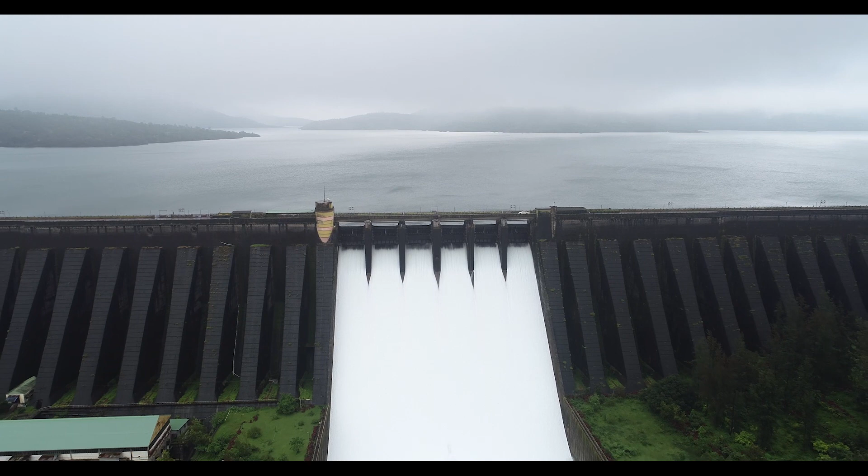The geographical character and features dominated by the Sahyadri ranges supported Chhatrapati Shivaji Maharaj in establishing Swarajya. In the mid of these Sahyadri ranges stands tall the Koyna Dam to fulfill its goal, keeping an example of the dominant character of Sahyadri ranges.

Millions of years ago, the outpouring of hot lava gave birth to sturdy, rigid and harsh mountain ranges of Sahyadri. These huge ranges also parent many rivers, mainly the 5 rivers of Panchaganga, which originates at one place. The Panchaganga temple at Mahabaleshwar is the original source of the rivers Krishna, Savitri, Gayatri, Venna and Koyna.

The famous Koyna Dam and Koyna Hydroelectric Project is a man-built wonder on the Koyna River which flows through the Western Ghats.

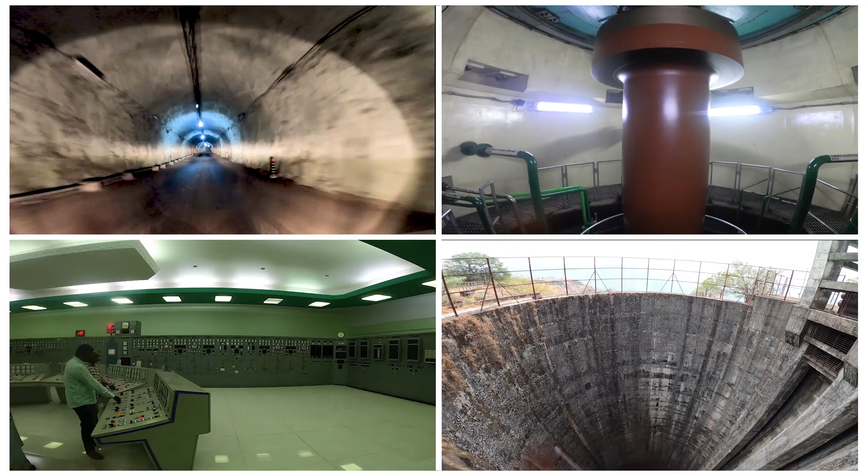For more than 50 years, this man-built amazing structure has played an important role in the development and progress of every sector across the state.

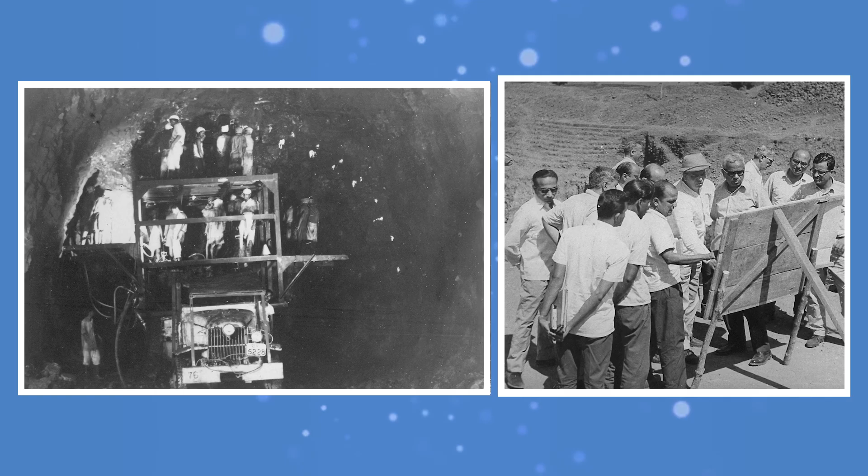Today, 1960 megawatts of electricity is generated through this project, which has emerged from the hard work and sacrifice of thousands of engineers.

This project has also helped in the development of many industries and has illuminated many colonies.

Also, many villages from the Sangli and Satara districts are receiving water supply for irrigation.

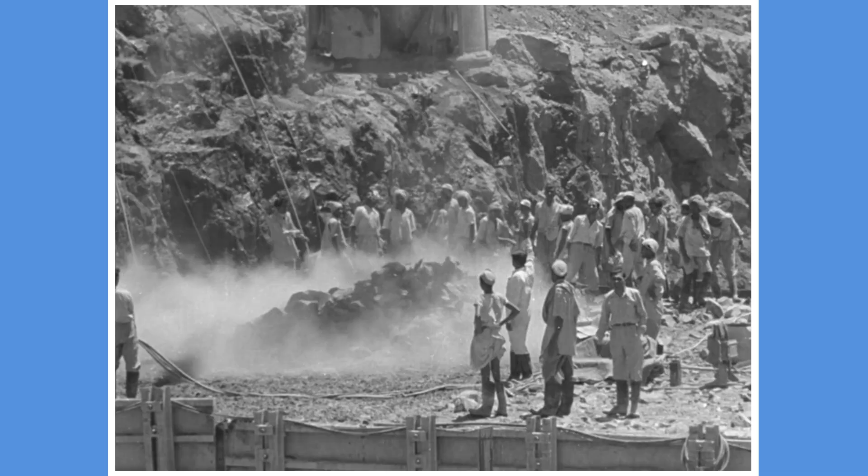But the journey behind the success story of the Koyna Hydroelectric Project was not smooth or easy. The year was 1901-1902, the period was of British rule.

Koyna River, which originates at Mahabaleshwar and flows through the terrain, was considered as a concrete solution on the drought since the rainfall in this region is 5,000 to 6,000 millimeters. 81% of the rainfall blends into the mainstream of the river. The entire valley is 2,000 to 3,000 feet deep.

Trampling on the difficult terrain of Sahyadri ranges, the then British officer H.L. Bill, along with his colleagues, set out for the expedition which marked the first step towards the mammoth and unique task. After combing the region of Koyna and Sahyadri ranges, an appropriate place was earmarked among the few villages for the dam. It was the Helwak village.

In 1909, a detailed report was submitted to the government of the then Mumbai province with an estimated cost of 81,92,000. Meanwhile, the industries in Mumbai were growing and so the demand for electricity too increased.

In the meantime, Meares, an engineer, indicated the possibilities of hydropower generation on Koyna River in the Hydroelectrical Possibilities in India survey.

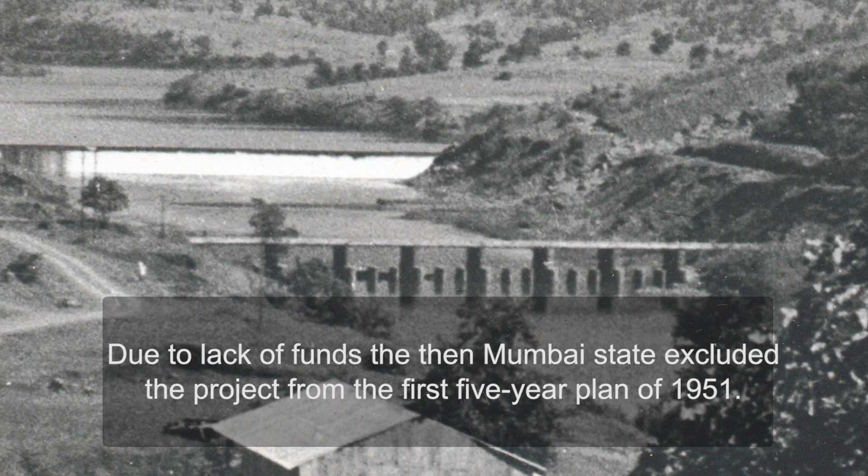The Deccan Manufacturers and Empire Association persistently followed and demanded the Koyna project. Due to lack of funds, the then Mumbai state excluded the project from the first 5-year plan of 1951.

On March 16, 1952, Deccan Manufacturers and Empires Association organized a conference at Helwak village. Along with Sant Gadge Maharaj, Bala Saheb Desai, C.D. Deshmukh, Karmavir Bhaurao Patil, Bhau Saheb Hire, Acharya Atre, Dr. Dhananjay Rao Gadgil and Kirloskar attended the conference.

Finally, on April 2, 1952, the delegation of Helwak Conference travelled to Delhi for a meeting with Prime Minister Pandit Jawaharlal Nehru. The project was approved, and finally, on January 16, 1954, the then Chief Minister Morarji Desai inaugurated the project.

The government provided proper compensation to the affected and also helped them during relocation and evacuation process. 101 villages were relocated into 5 districts.

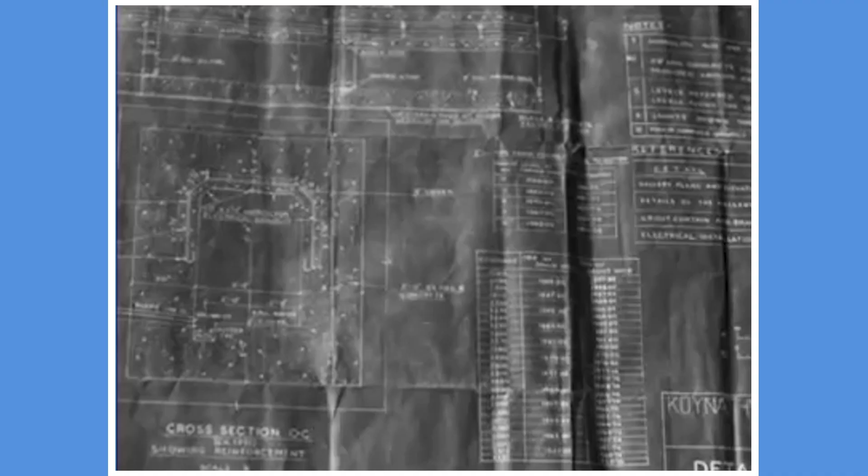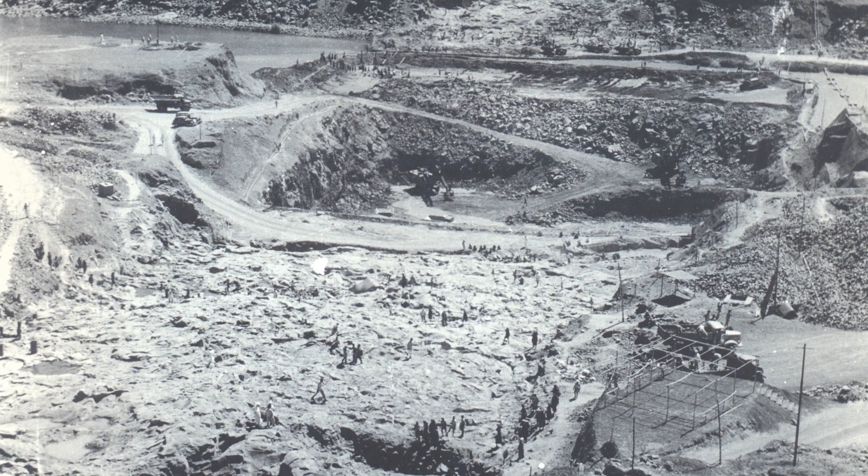According to the final report of the Planning Board, the Koyna project was planned to be carried out in 2 phases. In the first phase of construction, a target of storing 36.05 TMC water was planned at the height of 204 feet, while in the second phase of construction, about 98.5 TMC water storage was planned by increasing the height up to 268 feet. M.L. Chafekar was appointed as chief engineer.

Now the project was not just meant for irrigation, but also the important task was of power generation. The engineers geared up. Dam and Design Circle and Tunnel and Design Circle were the 2 board offices created by Chafekar and team.

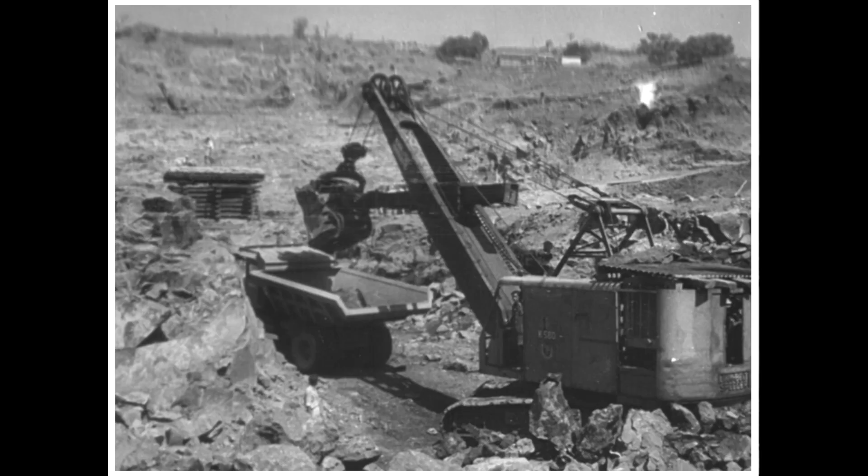The actual construction finally started on December 2, 1956. The workers and engineers immediately started working and were busy doing their jobs. Before monsoon, the flow of the river was diverted by constructing a dam, and the construction site too was dried up. The excavation was carried out on either side of the riverbed until they reached the hard rock.

The total construction of Koyna's 53 monoliths were homogeneous type. The construction of 6 monoliths on both ends were in stone, while the rest were in rubble concrete.

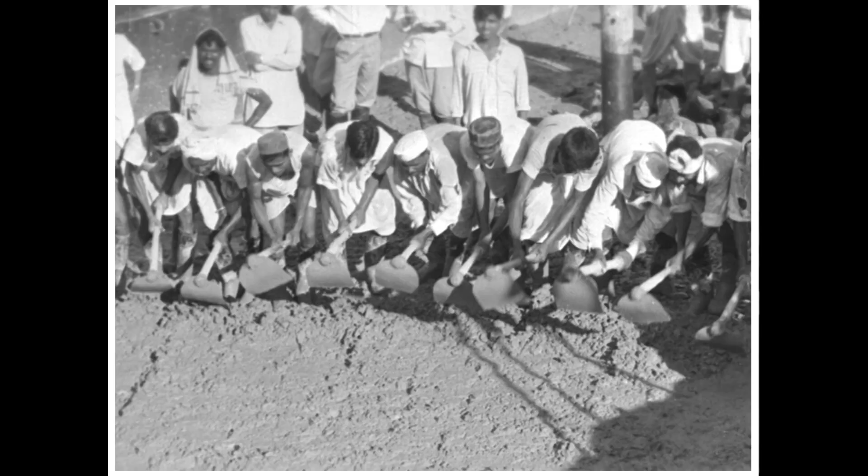At that time, in Germany, two dams, Iker and Oker, were under construction in rubble concrete. Our engineers travelled to Germany to survey the dam.

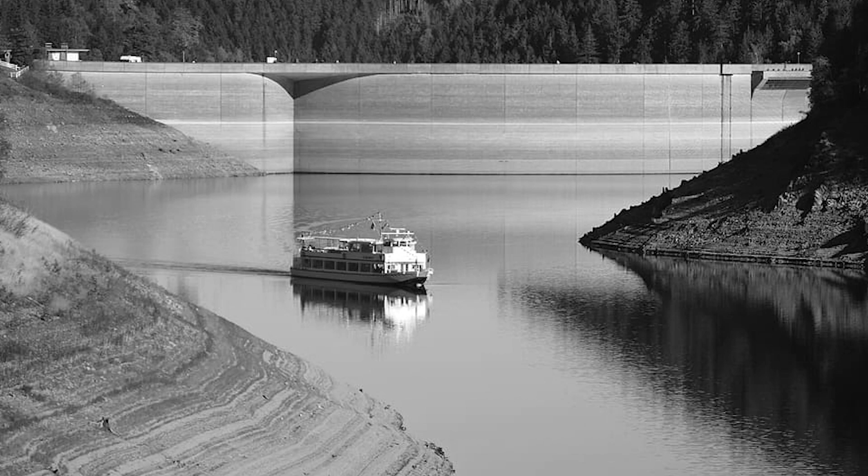Construction was progressing in a phased manner. The theme project that illuminated and brightened the state was actually taking shape due to the hard work of the engineers, thousands of workers, and the support and sacrifice of the villagers. Two long lane galleries were taking shape inside the walls of the dam. The construction of the dam begins in a planned manner.

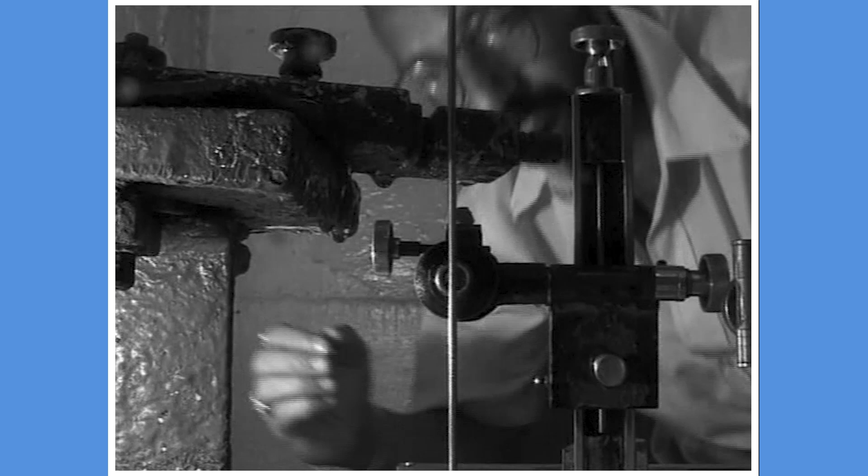Nearly 900 feet long, 5 feet wide, and 7 feet in height, the gallery was taking shape. The gallery is one of the most important parts. Measuring leakage, the pressure on the dam, and checking the temperature of concrete are important tasks done on a daily basis. Equipment like stress meters, thermometers, and V-notch are kept in the gallery. A precise report and calculation of the water leakage from the dam is done on a daily basis in this gallery.

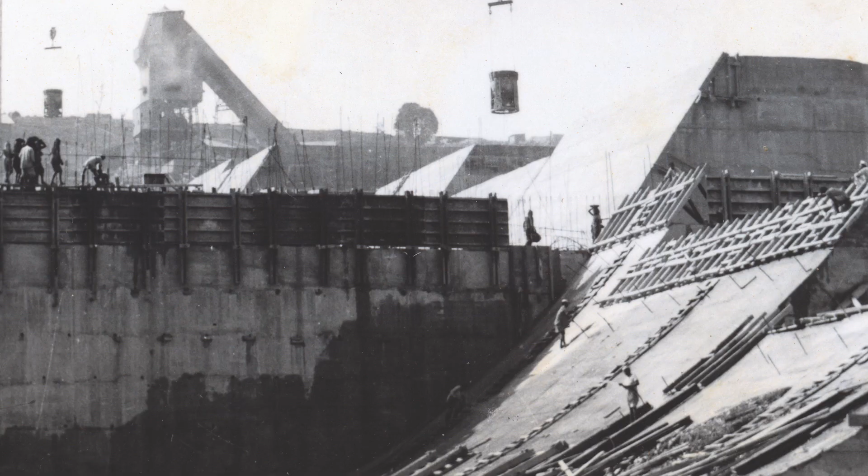With the dam walls, the drains too were being made curved for water to drain out easily. For the first time, in the monsoon of 1961, the dam overflowed and the water started flowing out from the passage or drains.

Meanwhile, for the increasing demand in irrigation and electricity, the A.N. Khosla Committee completed 2 phases of the dam together, with a slight change in the design of the dam to a height of 10 feet and widening of the upper part.

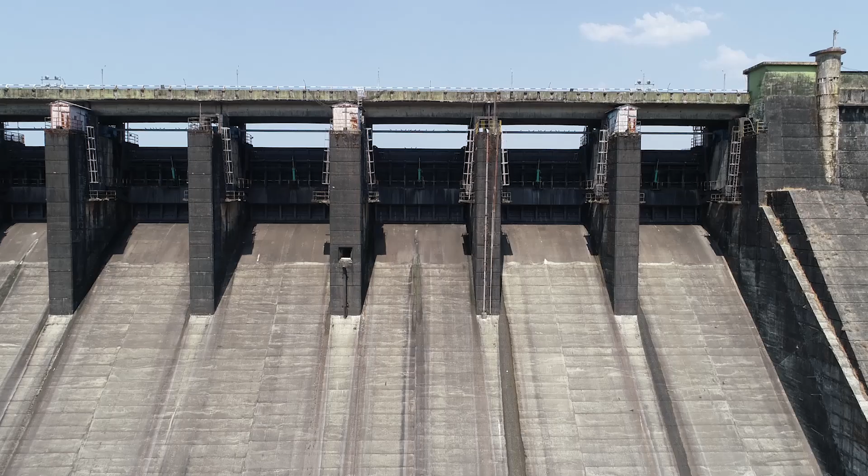On June 29, 1962, the first 2 phases of Koyna Dam were combined. Finally, by 1964, the construction of the dam was completed. The mechanical division of Koyna built the curved doors.

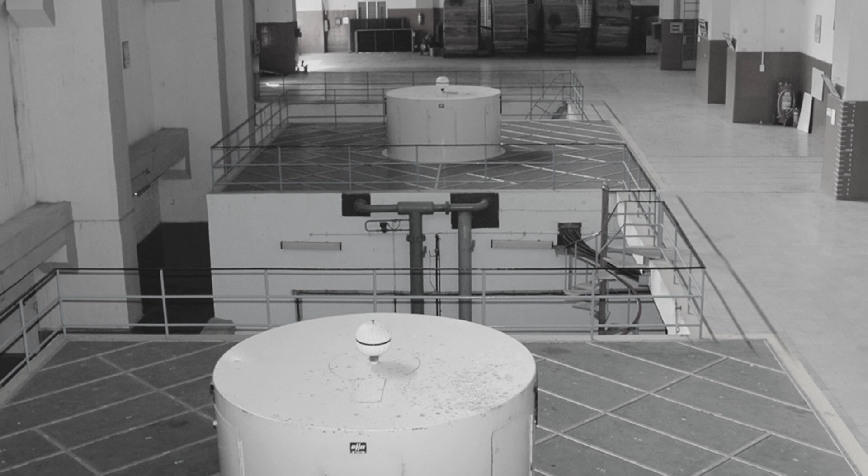While constructing the Koyna Dam, 2 penstocks were made on the right side of the wall for future power stations. Further, in 1975, 2 generators of 20 megawatt capacity were installed there.

While the dam was under construction, work on the power station had started in Pophali village, situated directly on the steep slopes of Sahyadri, 9 kilometers on the western side of the dam near the village known as Navja. For the same, an intake tower was being manufactured at Navja.

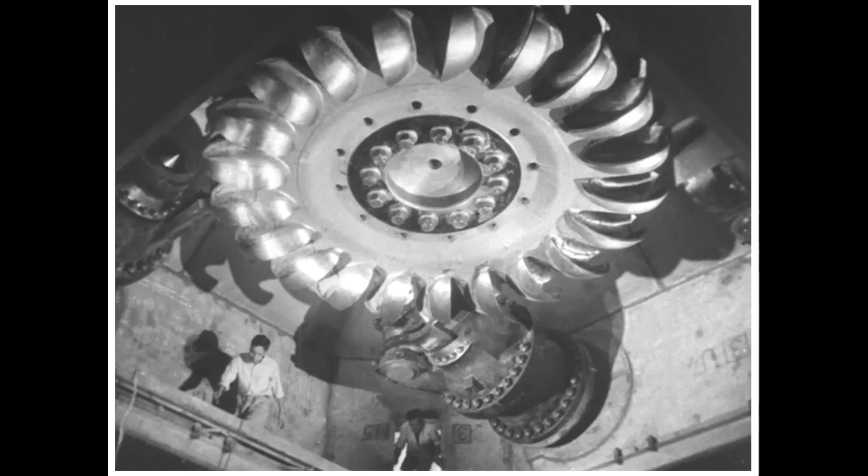Use of the steep slope from Navaja to Pophali was going to be utilized for rotating the turbine and generating power, for which a tunnel of 3,700 meters was being dug. This was an ideal use of the high Sahyadri ranges.

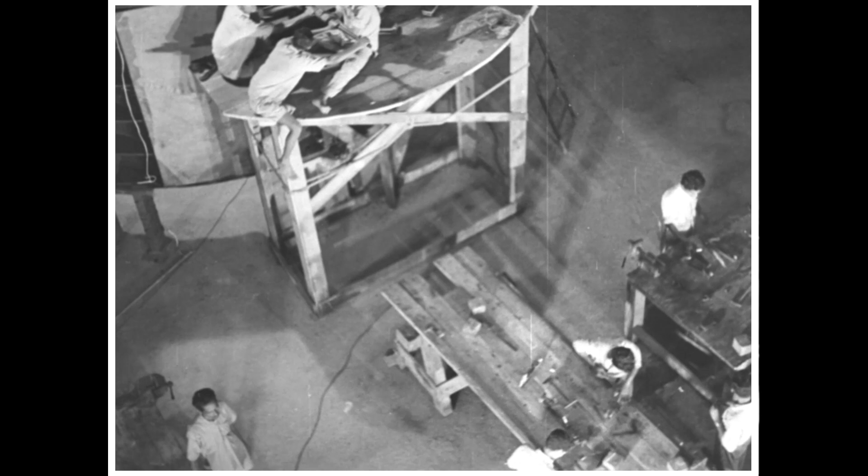Preparation for the underground power station of Pophali was in full swing. Here, of 8 turbines, 4 on each side were being installed. This is known as Koyna Phase 1 and 2.

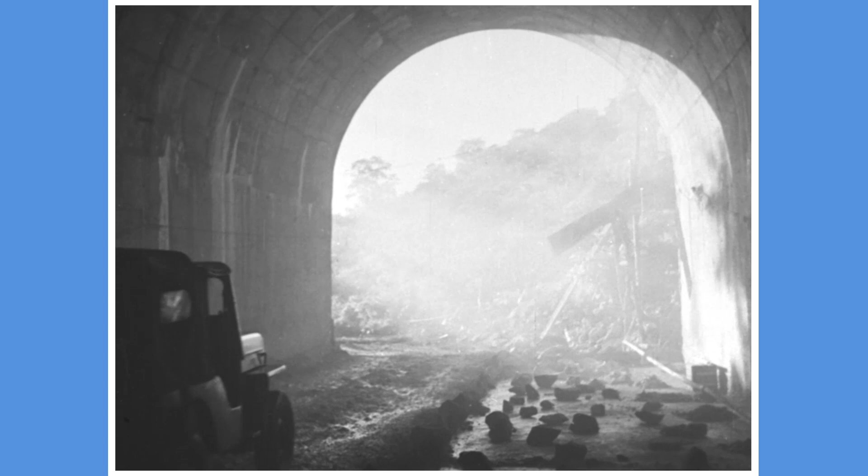A large tunnel was built to enter the underground power station, known as the Approach Tunnel. Instead of penstocks, the less expensive header tunnels were chosen for the underground channels in the Koyna area. At that time, due to underground pressure shafts, Rs 1.80 crore were saved.

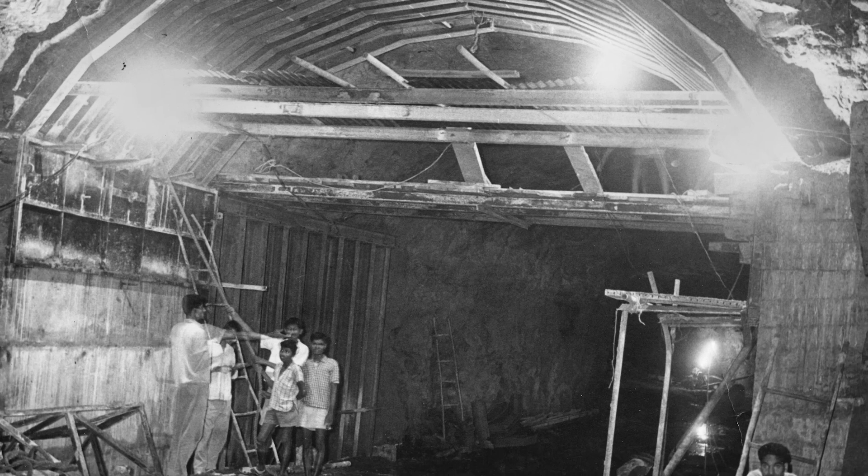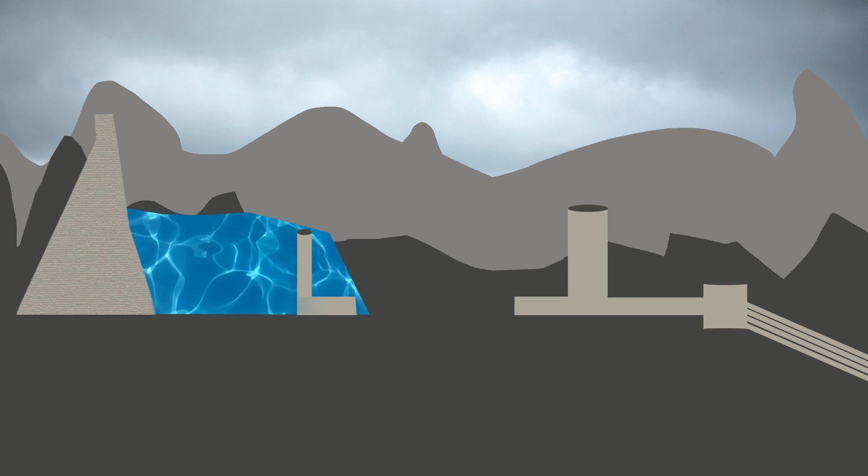The length of the head race tunnel was 3.748 kilometers and the diameter was 21 feet. The tunnel work was started from 2 places at the same time, one from the side of Navaja's intake channel and the other from the audit side. The head race tunnel was the only tunnel which was dug from both ends at the same time, and there was a small difference of 4 inches when the 2 sides came together.

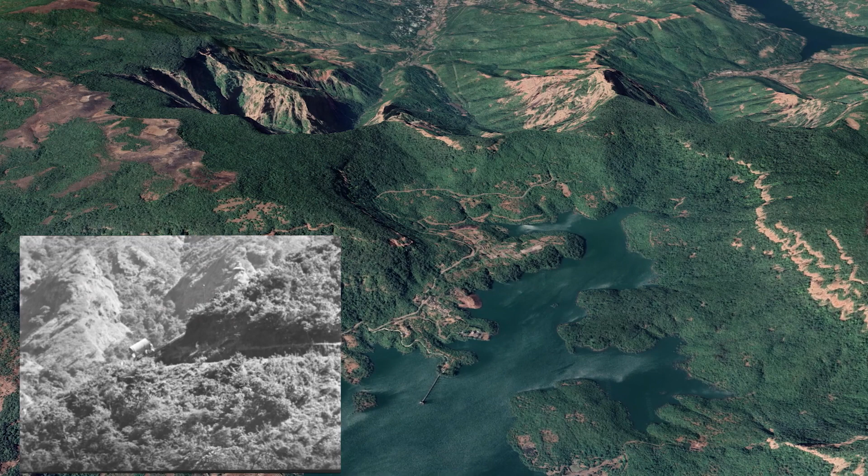A surge well was designed for the bouncing water when the turbine was shut or on. The work was carried out in difficult mountain ranges and in a very remote area.

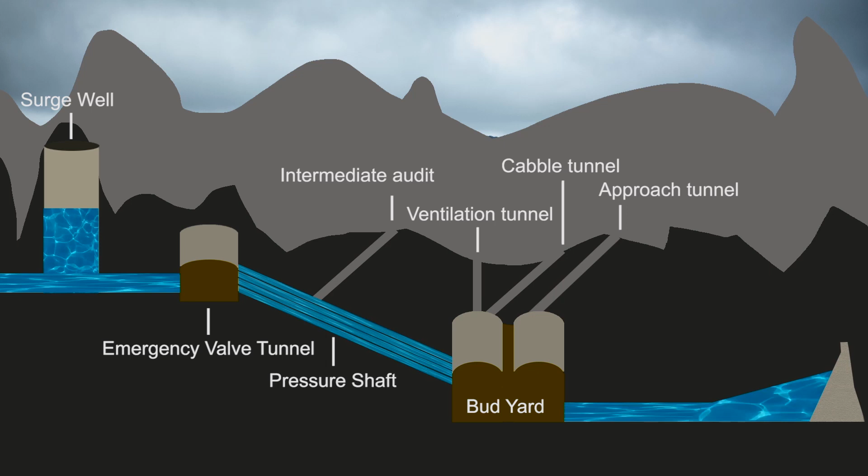The work of the pressure shaft is tough, strenuous and laborious. The 4 pressure shafts from the emergency valve to the power station travel through the Sahyadri mountains.

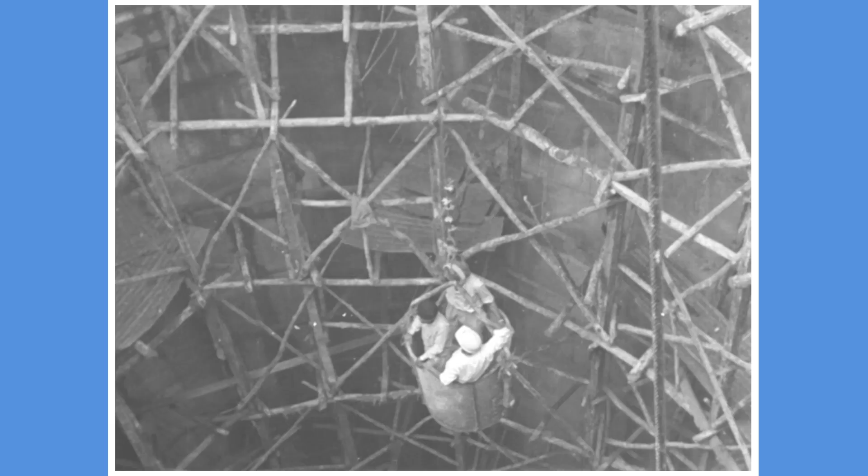A 10 feet diameter pressure shaft at a 45-degree angle and of 2,000 feet passes through a 12 feet diameter tunnel. From inside, steel pipes are attached to the pressure shaft. The engineers and workers worked day and night smashing the hard rock of Sahyadri.

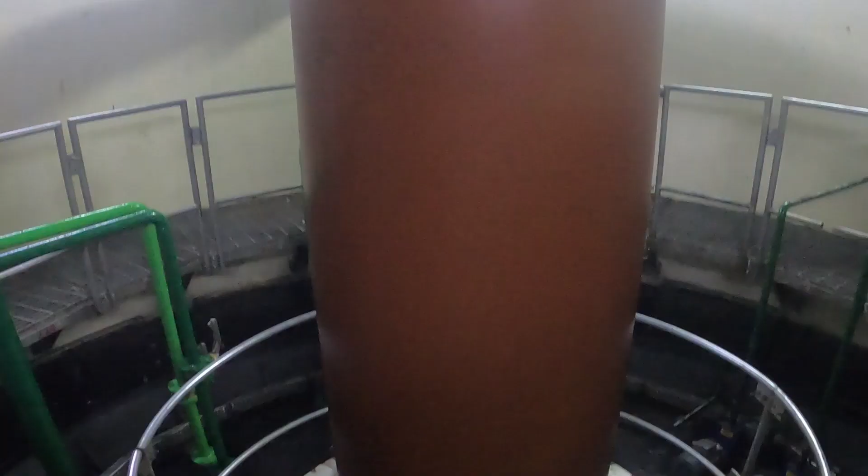The most important place after this is the power station. One can experience the scientific invention here.

Due to forced water, the fast revolving turbine generates power, and a water-controlling spherical valve is here. How is electricity generated? Fast falling water speeds up the revolving motion of turbine blades. The turbine is connected to the generator with the help of a shaft.

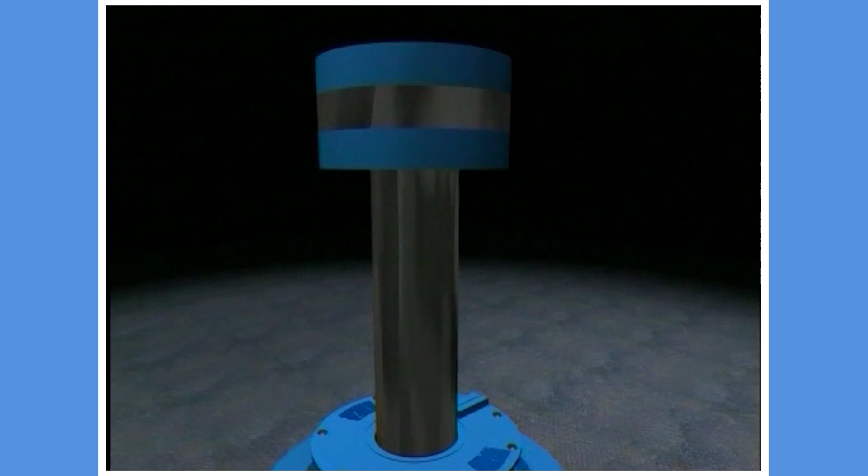Rotors attached to shafts have magnetic plates with electric currents, structured in north-south poles. Sets of copper wires surround the rotor. While moving in the middle of the stator, the poles of the rotor create a magnetic field that impacts the electrons in the copper wire of the stator to produce electricity.

A unique project was moving toward success through ingenuity, experimentation, and discovery, as this human endeavor was underway.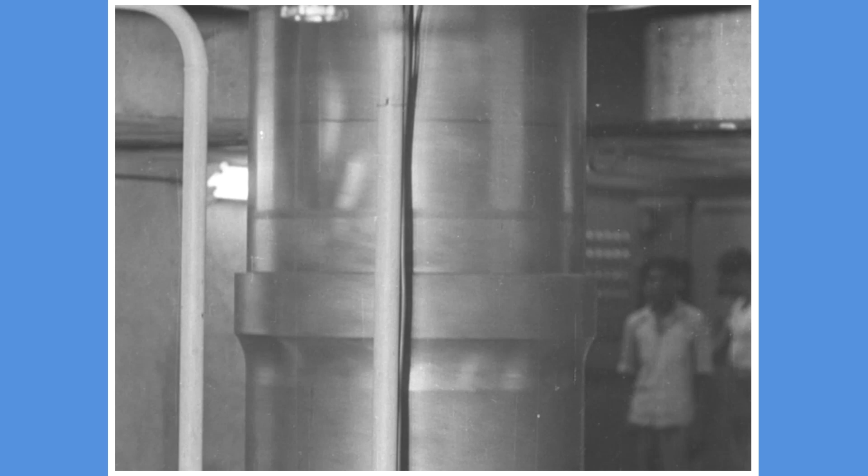Prime Minister Pandit Jawaharlal Nehru visited on April 10, 1960. On May 16, 1962, the first generator of Koyna was implemented by Honorable Chief Minister Yashwantrao Chavan, with both Phase 1 and Phase 2 together generating a total of 560 megawatts of power. With the help of Sahyadri and Koyna, the engineers' hard work took the first step towards illuminating the state.

With the ongoing project work, rehabilitation of the villagers was underway, as well as construction of a colony for the project employees at Koyna Nagar. While the state was getting illuminated due to the Koyna project, the day of natural disaster appeared.

In the early hours of December 11, 1967, a devastating earthquake of 6.7 on the Richter scale struck at Koyna Nagar. The earthquake was so severe that the tremors were felt in North Indian states as well as Southern Indian states.

More than 200 people died and more than 2,000 were injured in Koyna Nagar and the adjacent areas. About 10,000 houses in 40 villages were destroyed. Bridges like Helwak collapsed. The damage was innumerable.

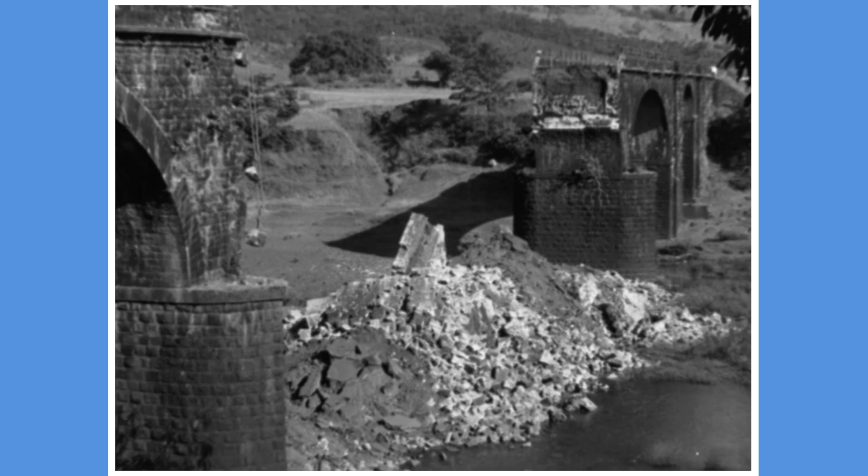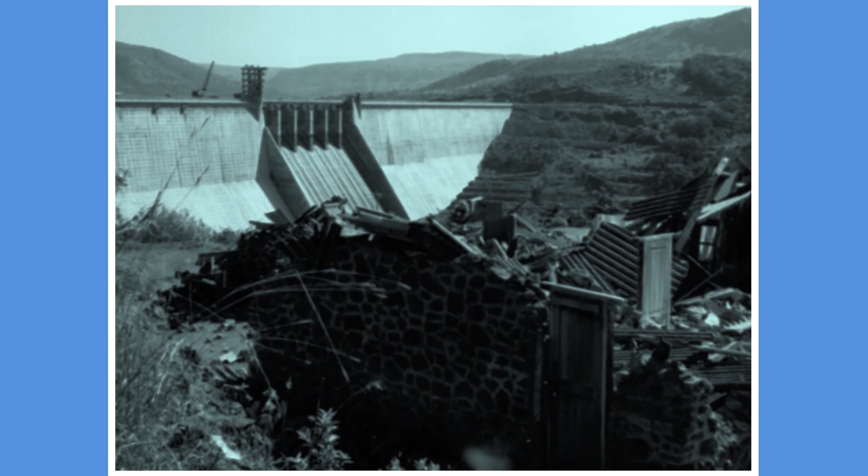After the earthquake, the dam was still standing firmly, but the dam walls were horizontally cracked at isolated places.

The central government and UNESCO sent a team of experts to suggest immediate permanent strengthening measures. As an immediate solution, the cracks were repaired with epoxy resin and polyester, and grouting and guniting were done on both sides.

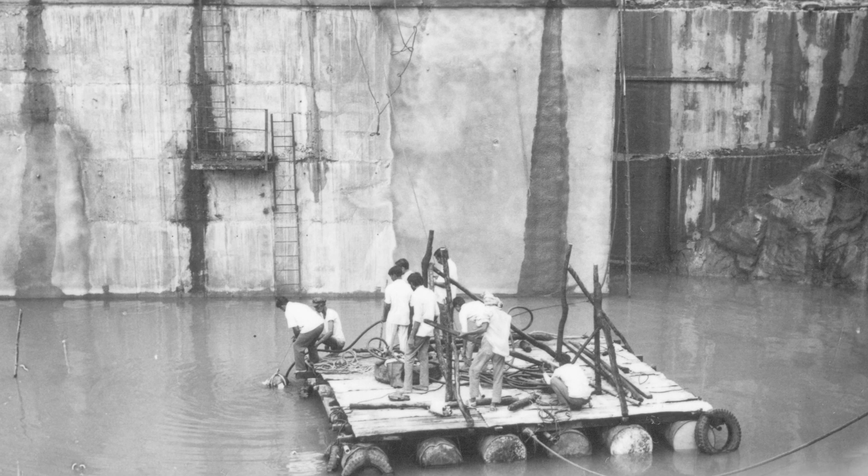Under the permanent strengthening measures, it was decided to create a buttress design on the dam to strengthen it after the earthquake. Closure concrete was used to integrate the old and new construction.

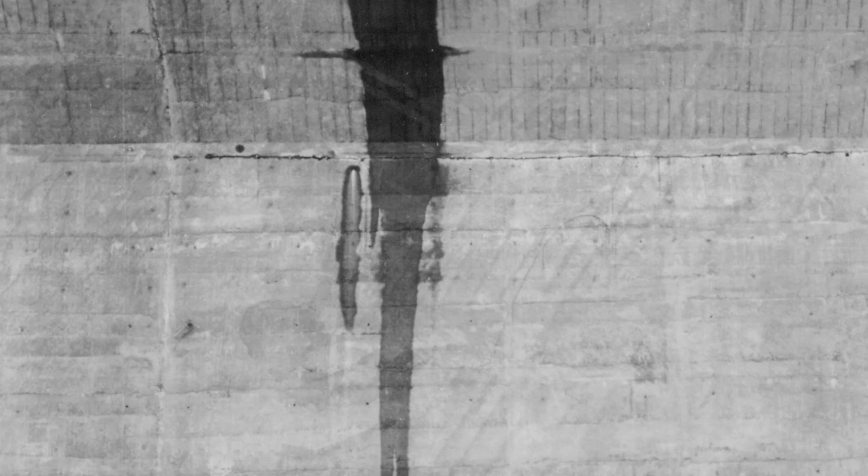At the same time, more cracks were found at the site where the upper part of the dam was modified while completing two phases of the dam in a row. Therefore, the top and bottom were connected with the help of cables. Holes were drilled from the top, cables were inserted, and concrete was filled. It was said that it looked as if the engineers had stitched the dam.

But due to the repairs and strengthening, Koyna Dam has become a strong dam. Every year, the dam is a boon for sustainable irrigation and power generation.

In March 1966, all 8 machines of Phase 1 and 2 were operationalized and handed over to the Electricity Board.

However, the water released from the Pophali site after power generation into the Vashishti River is 133.20 meters above sea level, presenting a golden opportunity to use the water again for power generation.

That is why it was planned to dig a 4.5-kilometer tunnel to stream the water released from Pophali into the basin of the Vaitarani River, construct the Kolkewadi Dam to store it, and build a power station at Alore to generate electricity.

The work on the load-bearing dam type started on December 25, 1967.

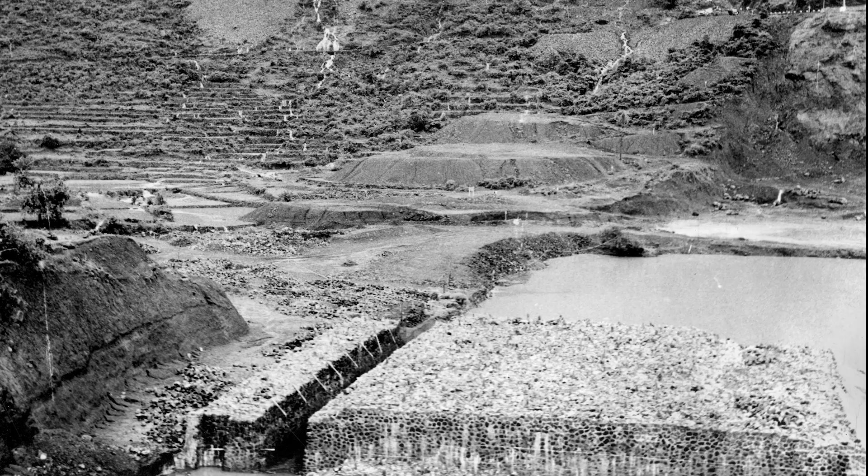The water from Phase 1 and 2 flows to Kolkewadi through a 42-degree angle into the Alore penstock and to the underground power station, which is 192 meters away.

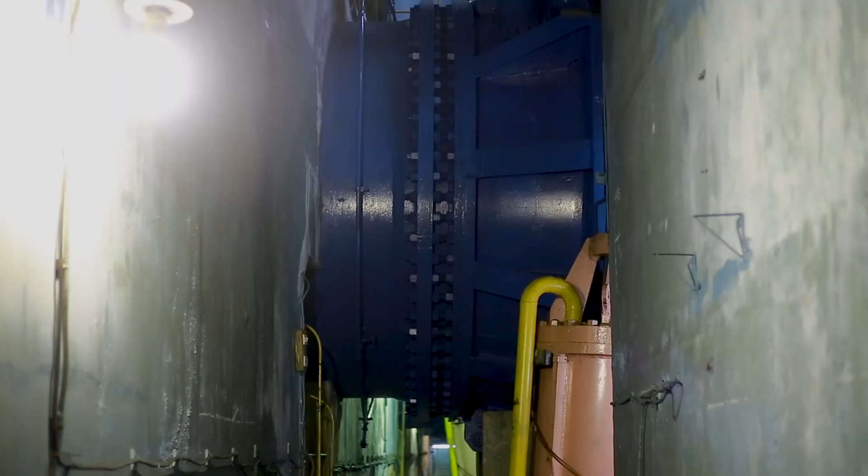Bharat Heavy Electricals Limited installed 4 generators of 80 megawatts each in Kolkewadi, adding 320 megawatts of power from water diverted from Phase 1 and 2.

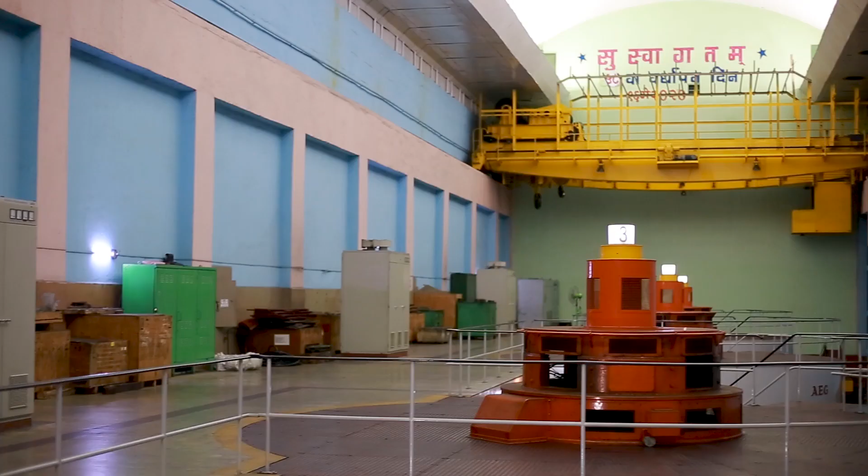The fourth phase of the planning was to make adequate use of water in the reservoir and convert the entire Koyna hydropower project from a base loading station to a peaking station, even though electricity was already being generated from Phase 1, 2, and 3.

Near Navja, where there was an intake tower of Phase 1 and 2, a plan was proposed to construct an underground power station of 1000 megawatt capacity, using water which directly flows to Alore through another tunnel.

In 1985-86, a World Bank team visited the project site for the survey and checked the submitted loan report, and in 1989 it sanctioned a loan of 40 crore US dollars for this project.

Building the intake in the fourth phase was a challenge as there was water stock in the dam. For this, it was decided to use the technique of lake tapping, frequently used in Norway, with the help of their experts. A lot of work was to be done before lake tapping.

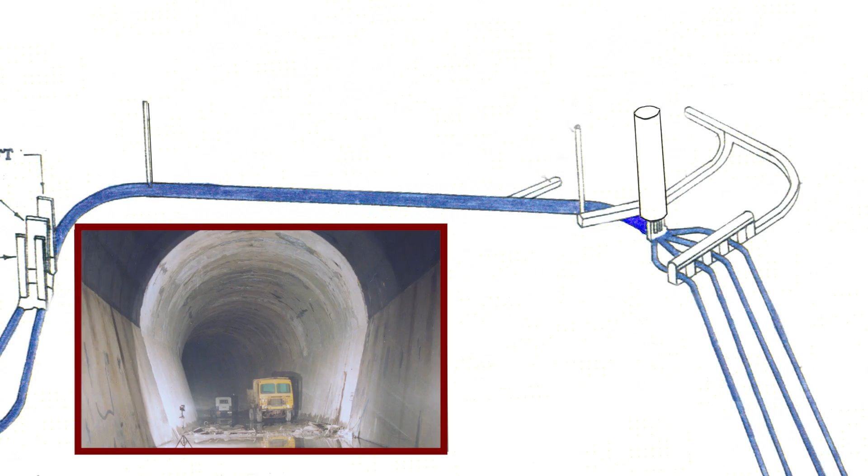It was not an easy task to be done on the huge and hard rocks of the Sahyadri ranges. The head race tunnel, surge well, emergency valve tunnel, and pressure shaft were very complex. Work from Navja to Surgewell, and from Surgewell to Alore's underground power station tunnel, had begun.

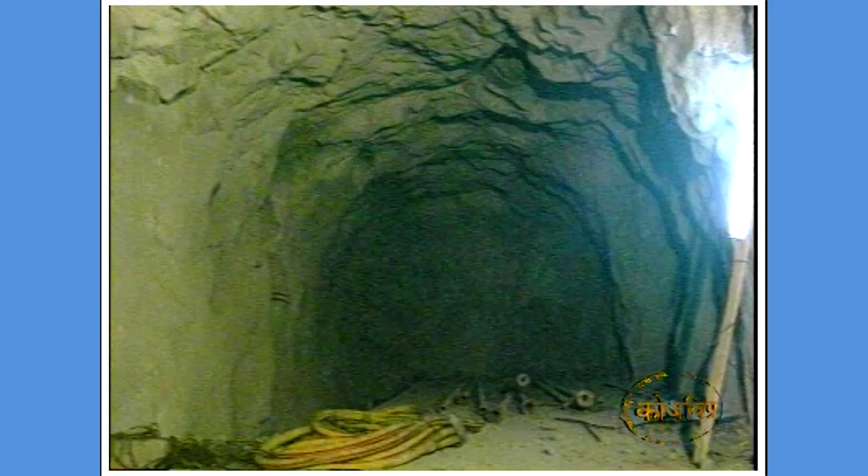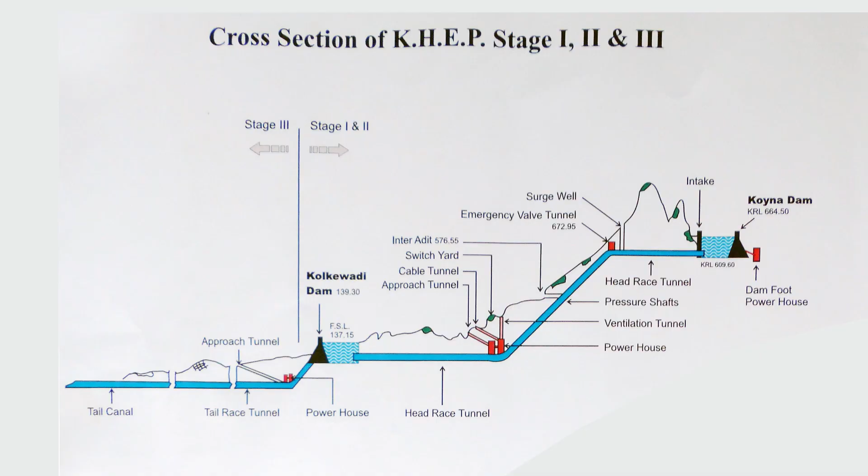The aim was to install 4 generators of 250 megawatt capacity. Although the fourth stage on paper was similar to the second stage, in reality there were endless difficulties.

Surveying these hard and harsh mountains of Sahyadri was a challenge. Occasionally, the workers completed the work by tying ropes. Blasting was done by piercing cavities and filling them with explosives. Several safety measures were taken care of.

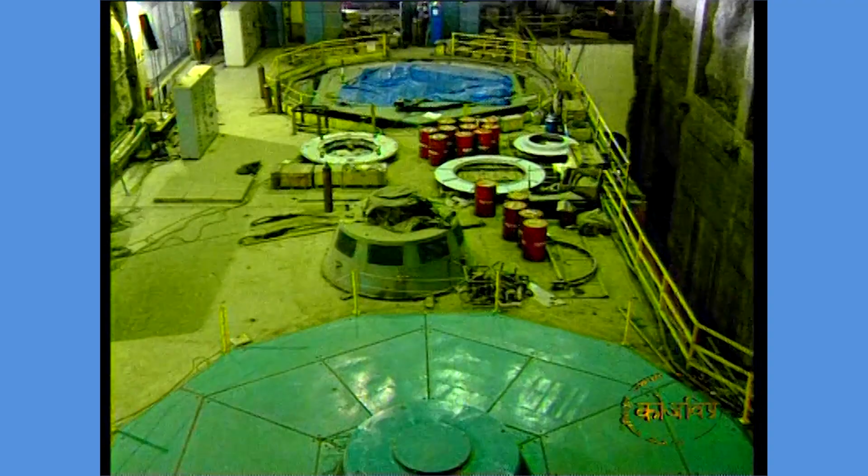As in the third phase, Francis turbine was also used in the fourth phase. Key factors and aspects of Phase 4: 4 machines manufacturing 250 megawatt each, and the HRT from the site of lake tapping to the intake tunnel.

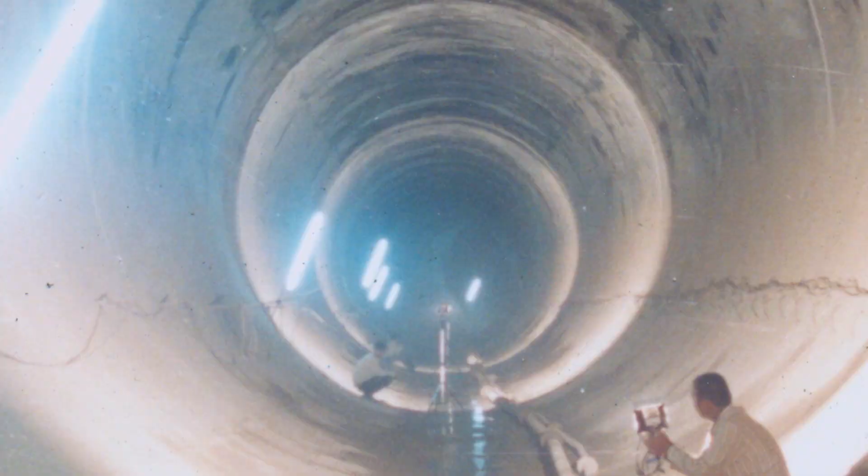Cement concrete lining of the tunnel was done. Length of the head race tunnel is 4.22 kilometers. Diameter of the surge well is 69 feet, while height is 430 meters. The pressure shaft was designed at a 58-degree angle on the ground, with 4 pressure shafts of 590 meters.

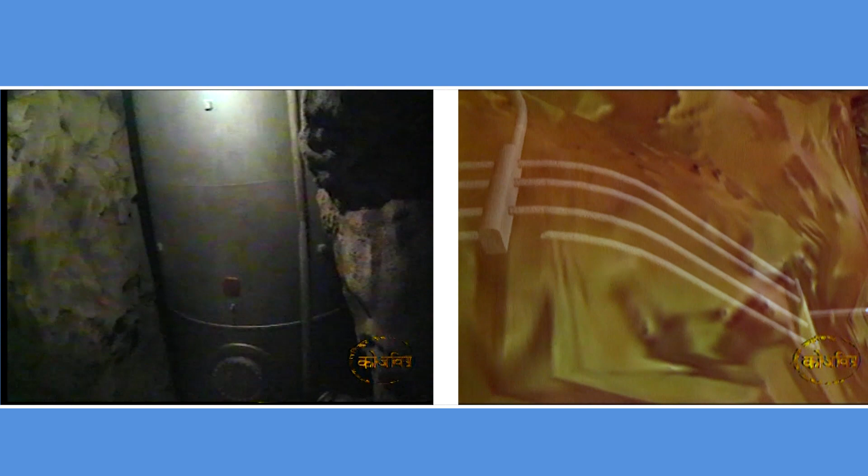Work starts in full swing in the turbine hall. Thousands of laborers and engineers were working day and night to install various machinery.

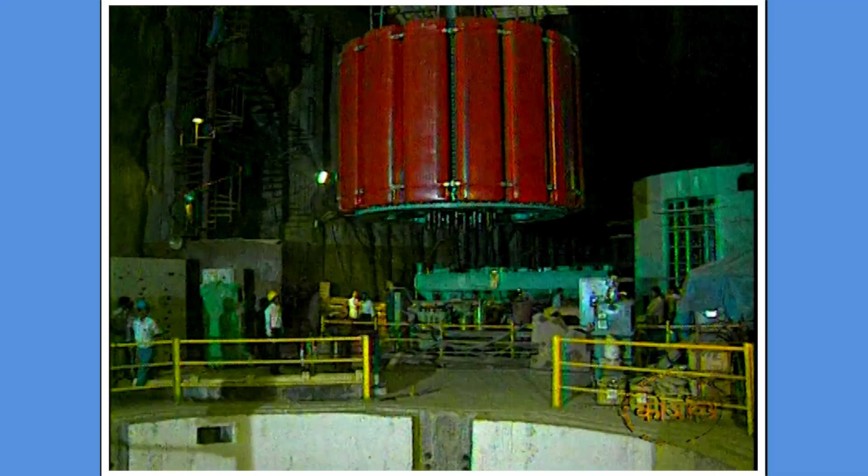In the fourth phase, there was no space to build a switchyard. So the country's first gas-insulated switchyard was erected using modern technology of SF6 gas in the transformer hall of the power station.

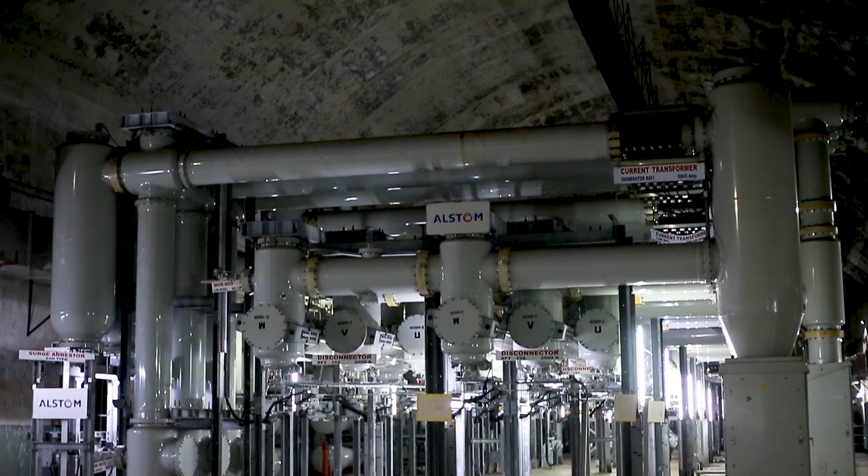If the switchyard was installed outside, many acres of land would have gone under the yard. But the new technology switchyard solved many problems.

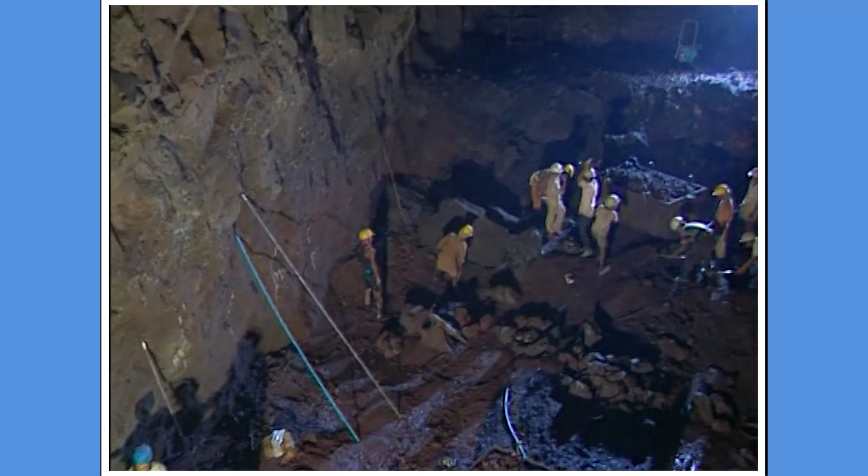The work of the power station with 2 intake tunnels was almost complete. This amazing project was taking shape with major components like the main power station. Now the preparation for lake tapping was in the final stages.

The work on the tunnel for lake tapping, the intake tunnel, was completed in 1997. Now, to break the 6-meter rock through the tunnel below the reservoir, it was filled with explosives by piercing holes.

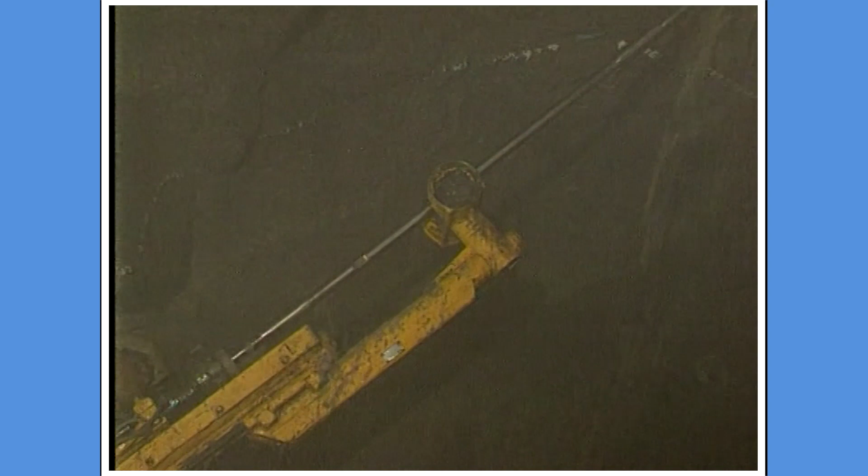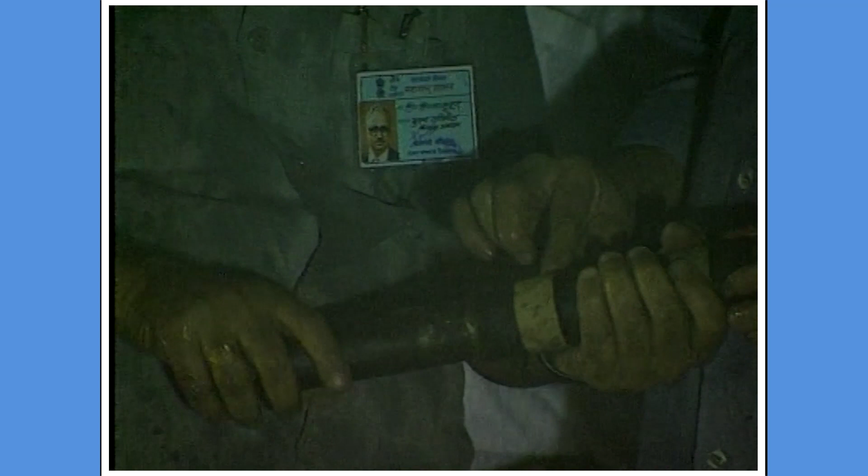Experts from Norway were deliberately called in. The possibility of some unexpected events while drilling holes in a rock under tremendous water pressure could not be ruled out, but it was a test of the engineers' courage, study, and decisions taken after hard work and research.

Finally, on March 13, 1999, in the presence of the then Chief Minister Narayan Rane and Deputy Chief Minister Gopinath Munde, Asia's first lake tapping was successfully carried out. As the key was pressed, the world saw the gushing water flow.

The atmosphere was filled with joy, pride, and happiness. Each and every person present had a smile of pride. The engineers and countless workers and laborers were satisfied and proud of their hard work. Today, 1,000 megawatts of power is being generated from the 4th phase.

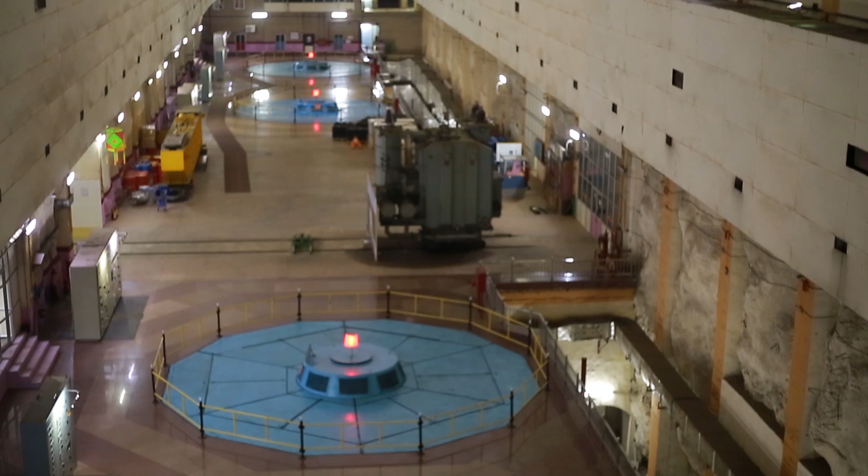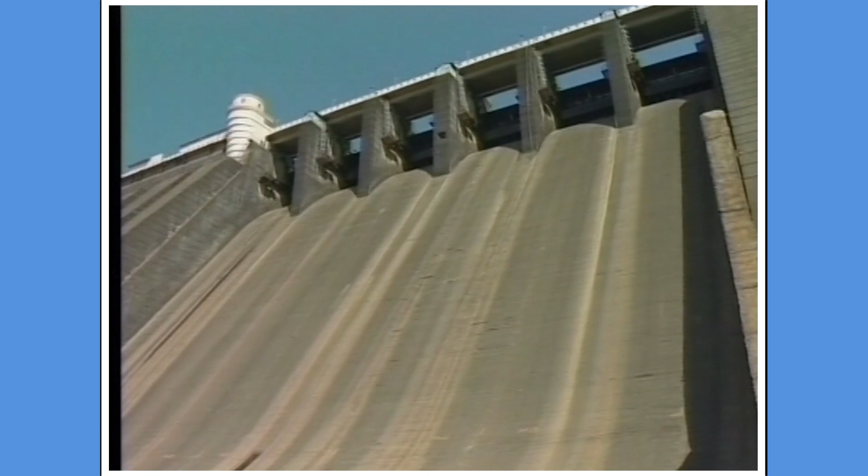Once again, strengthening of channels, the construction of the Koyna project was proceeding through various stages. Continuous attention and importance was given to the construction of the main dam. During the 1967 earthquake, the non-overflow area of the dam was repaired and strengthened, but the spillway was not repaired and strengthened.

Strengthening of the spillway became necessary after the 1993 Killari earthquake, as well as to raise the capacity of the dam from 98 TMC to 105.25 TMC. The process of spillway strengthening was also necessary.

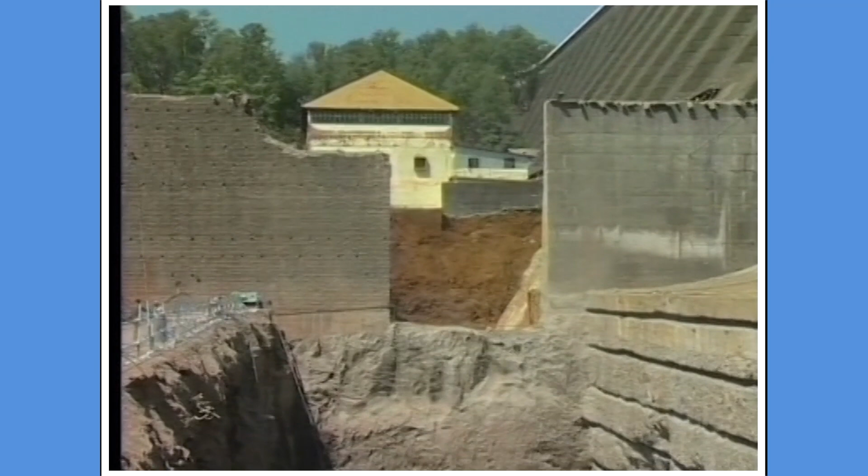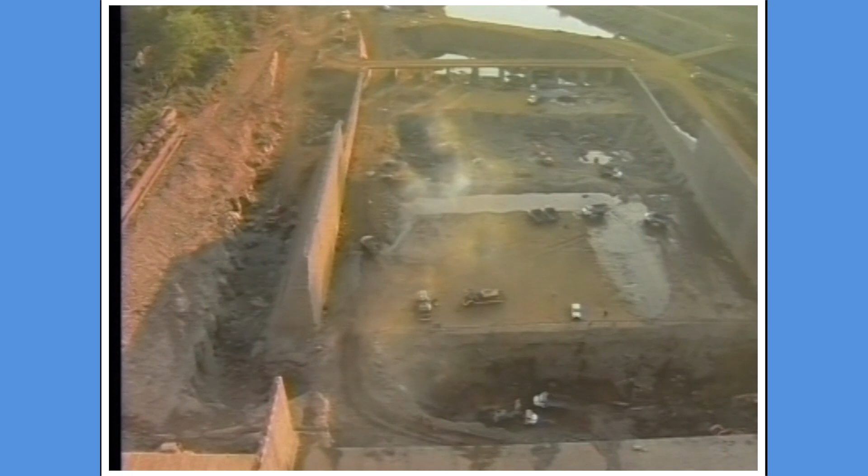The length of the stilling basin was increased by 52 meters to 115 meters. During this process, to control the temperature of the concrete, actual ice was used, for which an ice factory was set up at the site.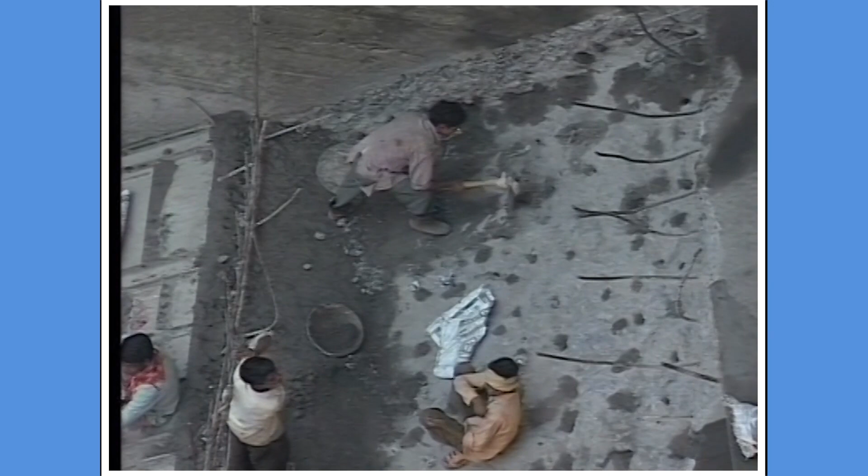It was a threat to life while working on the strengthening of the sewers in the second phase. The work was completed in a very dangerous situation. The difficult task was done in a phased manner by constructing a temporary raft.

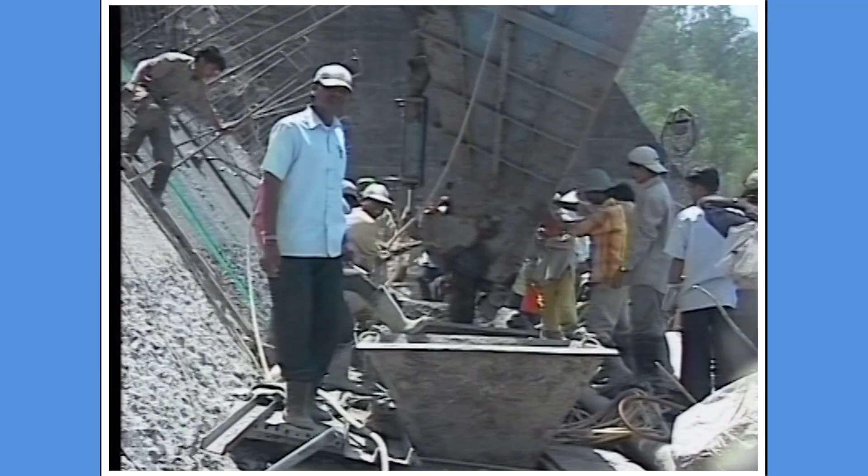The strengthening concrete, as well as to get the old and new concrete work of the sewers integrated, was filled up with closure concrete. Soon after the work was completed in May 2006 during the rainy season, the dam was full and the water released at a speed of 1 lakh cusecs acknowledged the strong and quality work.

Why was the fourth phase expansion necessary? The Krishna Valley Development Board was established in 1995 for Krishna River water distribution, to increase the area of irrigation by using available water immediately.

For new irrigation schemes, 50 TMC instead of 30 TMC water from the Koyna was provided to the drought areas, where schemes were launched by Krishna Valley Corporation in Mhaisal and Tembhu. Accordingly, 5-feet valve or flap gates were installed at the dam gates, and 105 TMC instead of 98 TMC water was stored after the strengthening in 2006.

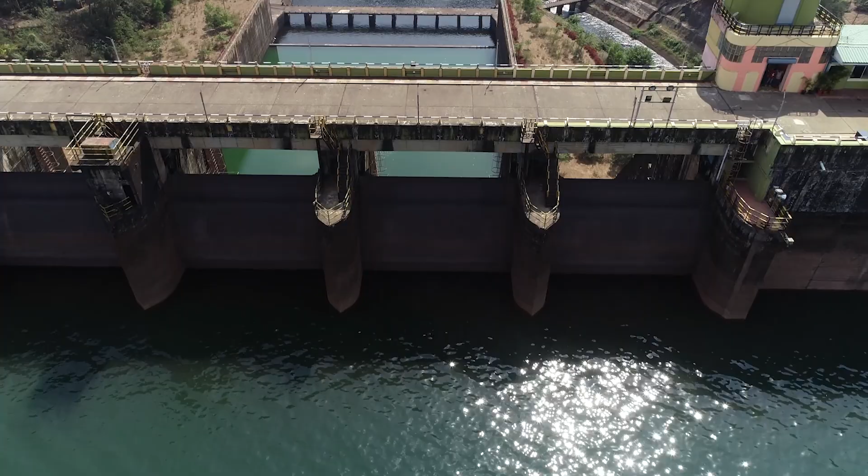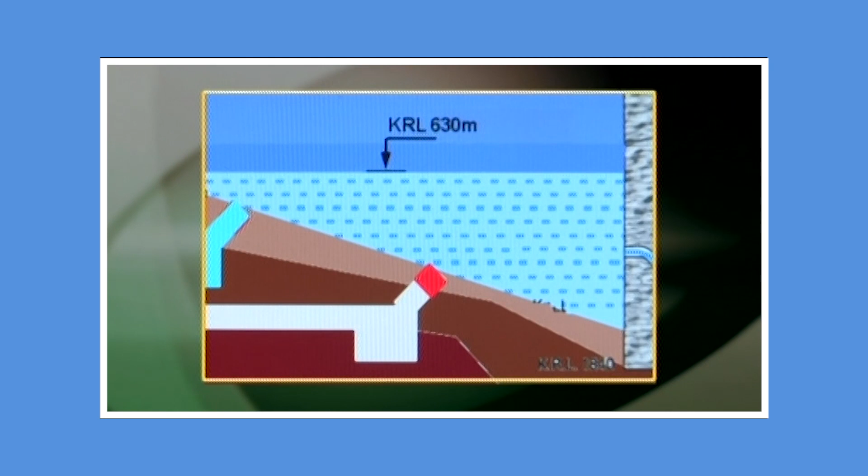Nevertheless, if water was released for irrigation, the water level of the dam would have decreased in summer, and the water level required at the lake tap site and above the intake tunnel would have been reduced by 12 to 13 meters, which was a threat to the turbine, as well as the possibility of power generation from Koyna plant being stopped. So the only option was to go to 618 meters deep for one more lake tapping to keep the power generation intact in the summer.

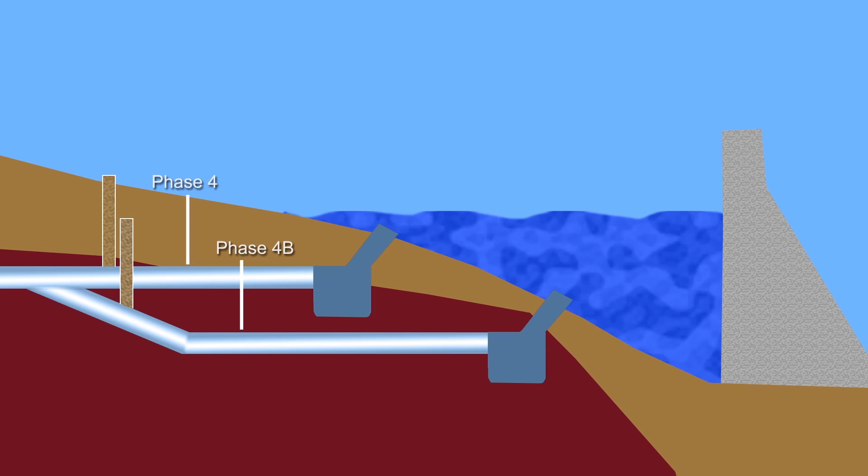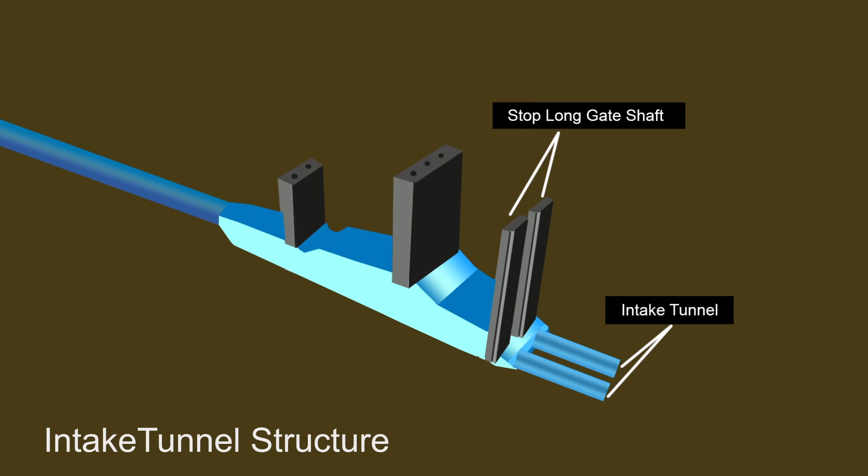The focus was to connect the 4-phase old HRT to the extended HRT. A survey was followed by a plan of lake tapping, and the work started in 2001. Work on the 4.5 kilometer long head race tunnel started, including 2 intake tunnels, a stop long gate shaft, trash rack shaft, and service gate shaft. Engineers faced the challenge of connecting the extended HRT to the old HRT.

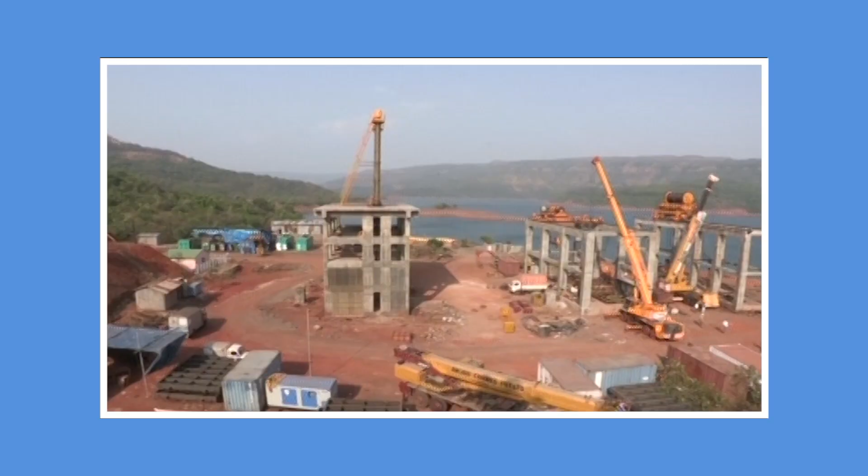For this work, the power generation of the 4th stage would have to be stopped for 200 days. The electricity board refused, and so the work stalled a little. However, after renewed efforts in 2010, work resumed after the electricity board closed the 4th phase for the required period.

The work started on July 16th and was completed on October 31st, 2010. The second lake tap was designed just like the first lake tap. The second lake tap was successfully inaugurated by the then Chief Minister Prithviraj Chavan and Deputy Chief Minister Ajit Pawar on April 25, 2012.

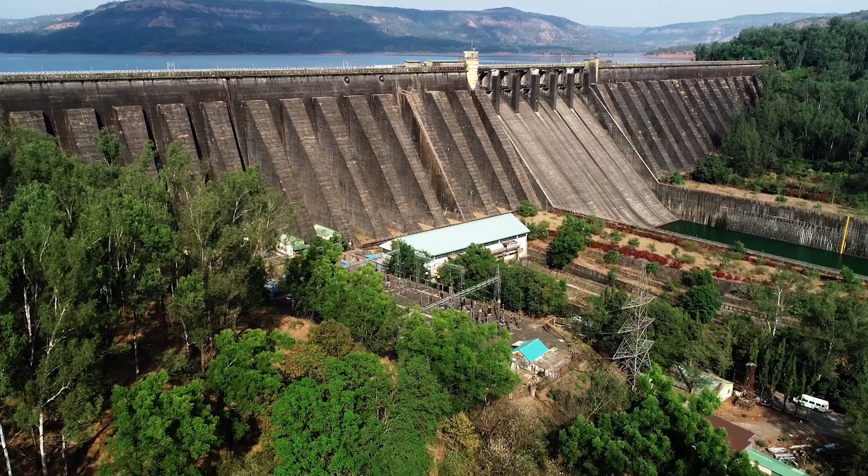Today, 1960 megawatts of power is being generated through Phase 1 to Phase 4 and the extended phase through Koyna Dam. At present, power is being generated from the power station on the right side of the dam wall. Similarly, work is underway on tunnels for power generation by streaming water through tunnels on the left. Soon, it will start generating power.

At the same time, Phase 5 is proposed at Humbarali Nala, Ozherde waterfall. Today, Koyna Dam is not only a major power generating hub in hydro project type, but also a tourist destination. This beautiful area is of special importance. Ozherde Falls is a tourist attraction like Koyna Dam. Thousands of tourists visit here every year to see the Ozherde Falls.

Koyna Sanctuary is well known and has played an important role in the Sahyadri Tiger project. The lush green dense bushes around Shivasagar, named after Chhatrapati Shivaji Maharaj, beckon tourists and mountaineers. Spread over 426 square kilometers of forest, it got sanctuary status in 1985. Mountaineers are very much interested in places like Vasota, Chakdev, and Nageshwar. Tigers, leopards, bears, deer, gaurs, and various other animals, birds, and reptiles are the wealth of this sanctuary.

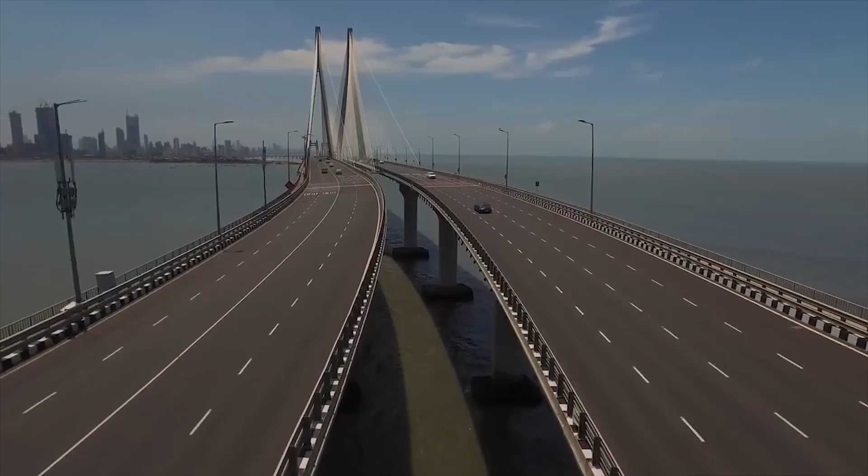After independence, the country made significant progress in many fields, from ISRO's space missions to manufacturing industries and medical education sectors. But the essential thing for progress in all these sectors is electricity. Before power generation started from non-conventional sources, projects like Koyna gave Maharashtra a big hand in the emerging times.

The central government has recognized the outstanding performance in good management, monitoring, storage capacity addition, strengthening, and uninterrupted service being run by the Koyna department for more than 50 years. The project was awarded the CBIP award by the government in 2019.

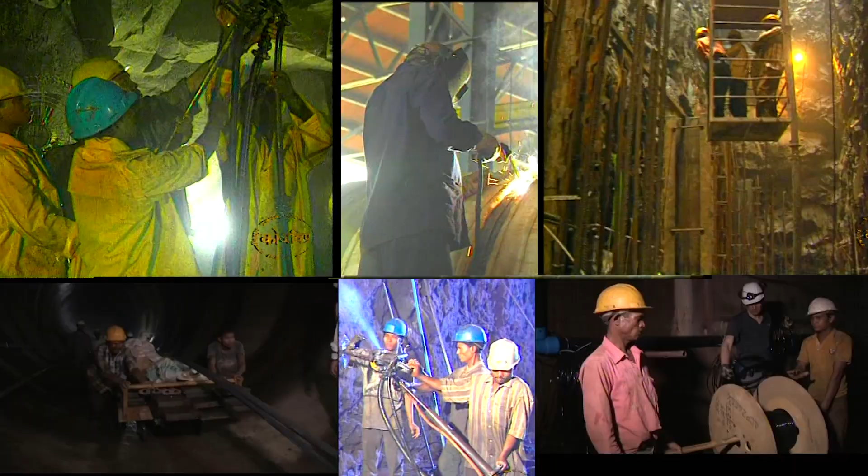Proper planning of the government, the relentless efforts of the engineers, employees, workers, as well as thousands of known and unknown hardworking families who have given up land for the dam, the electricity of Koyna is still flowing in the form of Lakshmi, in homes, industries, and various businesses, taking a key role in the progress of the state. Therefore, the Koyna project is called the Lifeline of Maharashtra. Through Koyna Dam, this energy of light will continue continuously and will increase.